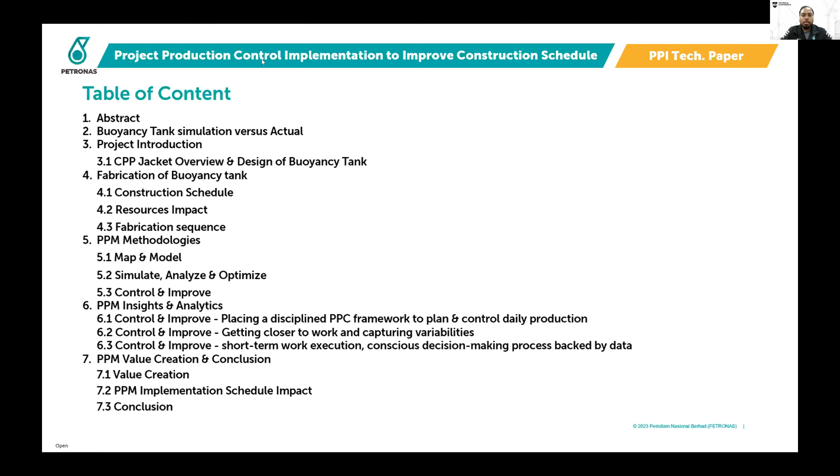The presentation outline consists of 7 parts. I will be explaining the first 3, and my colleagues will explain the rest. Next I will touch a little bit on the abstract. For this paper, it actually demonstrates the effective application of project production management methodology to positively impact construction progress and increase productivity, while exposing sources of detrimental variability as the focus of continuous improvement practices, and at the same time sharing lessons learned and best practices with PPM practitioners across the globe.

For this PPM implementation, in this specific case, our buoyancy tank has been identified as the critical path that drives the overall CPP Jacket construction schedule. PPM supports this finding by exposing the high capacity demand during the fabrication process. During construction of the buoyancy tanks, the demand and duration of the fabrication was underestimated due to its design complexity, and PPM methodology was adopted as an additional measure to complete the scope timely.

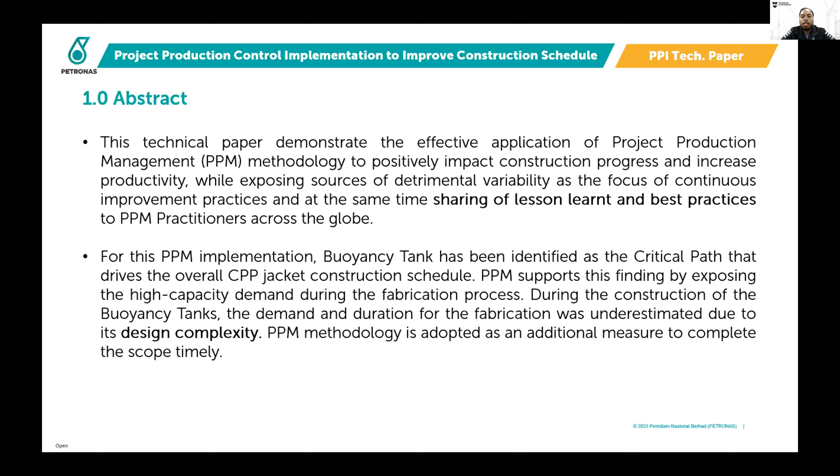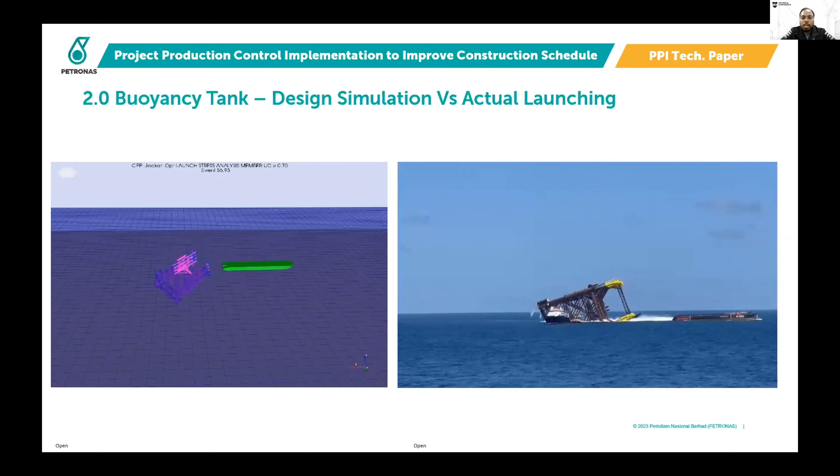Before we move on further in this presentation, I would like to share a success story following our CPP Jacket installation. Allow me to play these 2 videos, showing the comparison between our design simulation and our jacket launching at the actual site. As you can see, this shows how important and significant the buoyancy tank is, because in order for us to float the 18,000 metric ton jacket, we need that buoyancy tank, and it ensures that the operation is safe and smooth.

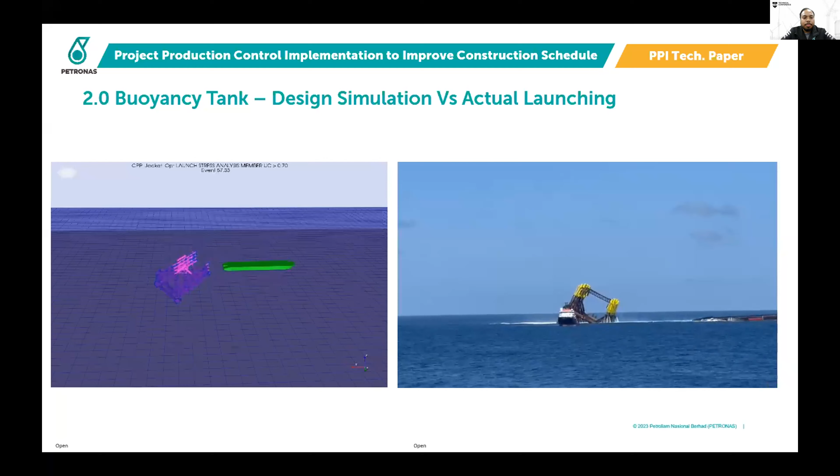So I will touch a little bit on our project overview, and also a brief CPP Jacket overview. This jacket is an 8-legged jacket at a water depth of 108 meters. It has 12 skirt piles with penetration of 102 meters below mud line. And the weight of the jacket is quite huge, about 18,500 metric tons.

The jacket has 7 buoyancy tanks, and the weight of each buoyancy tank varies. BT1 and BT2 are about 435 metric tons each. BT3 and BT4 are about 191 metric tons. BT5 and BT6 are 231 metric tons. And last, BT7 is about 261 metric tons.

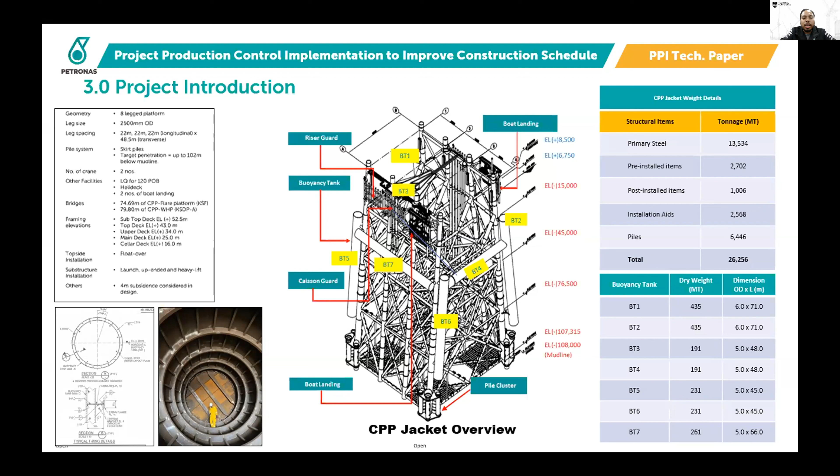As you can see in the picture below, this buoyancy tank was heavily strengthened by T-ring and angle bar at its 16 mm shell to cater for hydrostatic collapse during the launching operation. Each buoyancy tank has 2 to 3 internal flooding compartments for the jacket set down process. This picture shows how massive the buoyancy tank is compared to a normal-sized man.

The next slide shows our buoyancy tank fabrication, assembly, and erection at our contractor's fabrication yard. It also shows how massive and complex the buoyancy tank is during fabrication and assembly. So that's all from my part.

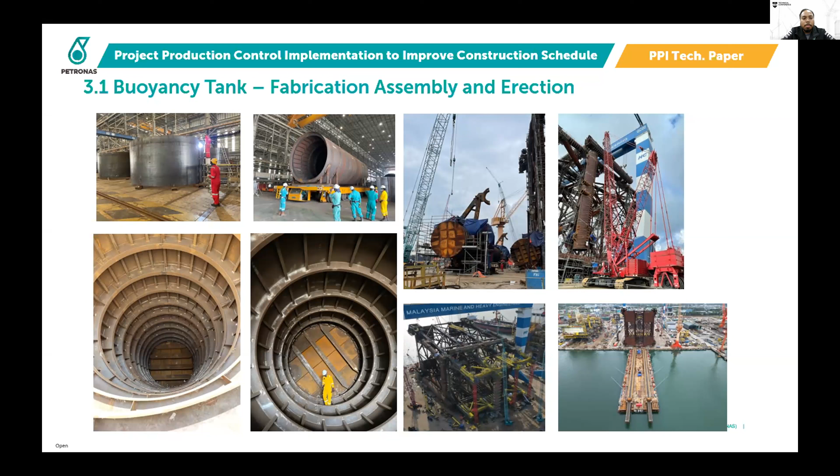For the next part, I would like to invite my colleague Puan Hamidah to continue this presentation. Thank you, Hafiz. Good morning, everyone. Now I would like to explain how the comprehensive design of the buoyancy tank has impacted construction activities. Due to the design complexity of the buoyancy tank, we have identified three major impacts to the construction.

The first one is the construction schedule itself. The second one is the increased number of resources required. The resources were segregated into a few categories; however, for this sharing we have selected three types of resources: manpower, equipment, and materials.

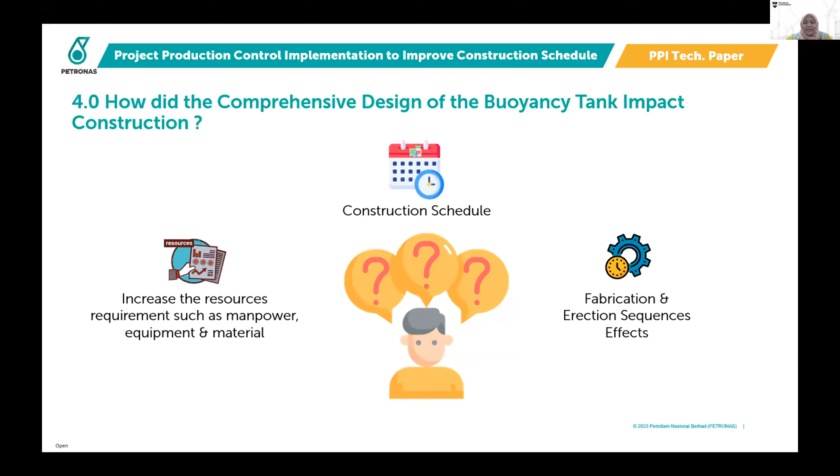And the third one is the major fabrication and erection sequence changes. Okay, so let's see the first one.

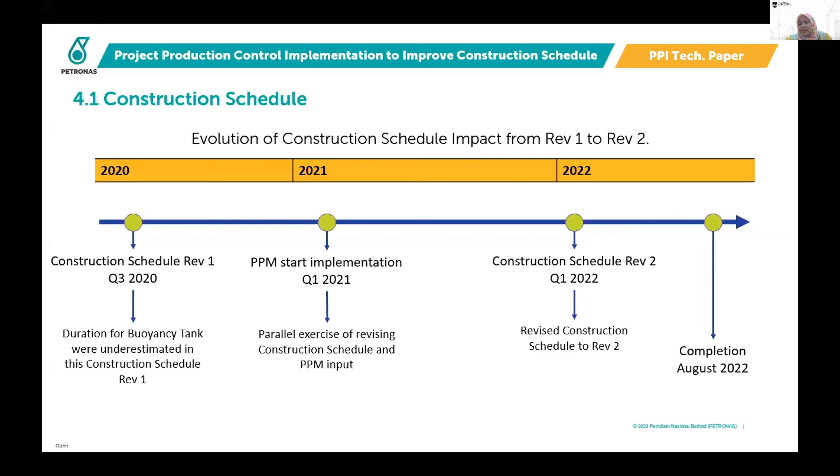In Q1 2021, PPM was implemented, and a parallel exercise of revising the construction schedule and PPM input led to the master schedule being revised to revision 2 in Q1 2022. As you can see, the schedule is moving to the right and required more days to complete the fabrication works.

Now we move to the details of the impact to the resources. The first one is the manpower. Based on the master schedule revision 2, the cumulative number of man hours specifically for construction duration for the buoyancy tank

has increased about 20% from plan versus actual. This increment is due to the complexity of the design, which required more manpower and man hours to cater to the fabrication activities. So the second one is the number.

In equipment loading, there was an increased number in equipment loading. For example, the crane usage, which the initial plan was to utilize two numbers of 600 metric ton crane. However, due to the size and weight of the buoyancy tank itself, the crane capacity had to be changed

to two numbers of crane, which increased the capacity of the crane to 400 metric ton and 1,200 metric ton, to cater to the lifting and erection activities.

And the last one under resources is the additional material required in order to support the complexity of the design. Based on record, a variance of 1,074 metric ton was recorded as the additional material required as compared to the FEED design, which was supposed to be 900 metric ton for only two numbers of buoyancy tank.

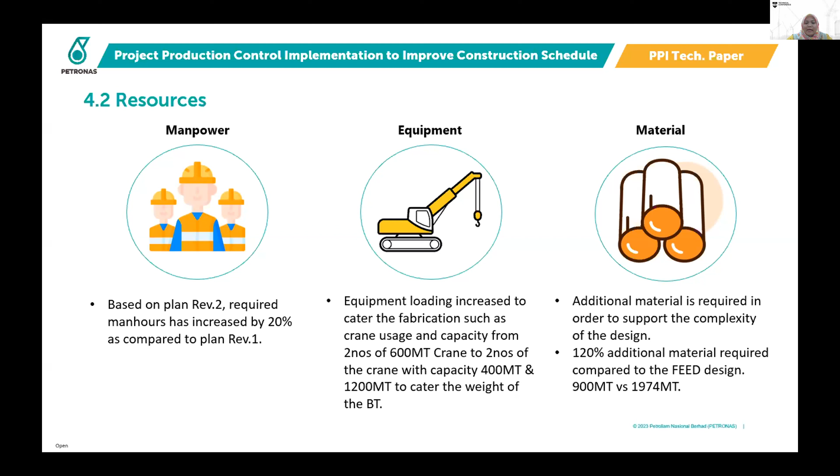However, the actual is 7 numbers of buoyancy tank with a total weight of 1,974 metric ton for all the 7 numbers.

The last one is the fabrication erection sequence impact to the project. As you can see, on the left-hand side is the planned erection sequence versus the actual erection sequence on the right-hand side. The planned erection sequence is supposed to be from buoyancy tank number 1, 2, 3, 4, 5, 6 and 7 accordingly.

However, in actuality, the numbers jumbled and it goes to 1, 2, 4, 7, 5, 3, and 6. The actual sequence has been rearranged to cater to the design complexity and to expedite the construction progress.

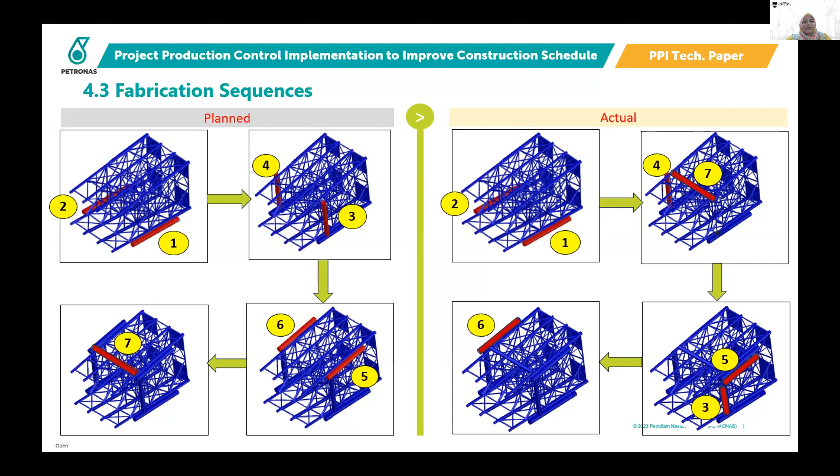So, the construction industry is a complex and dynamic field that requires effective management strategy to ensure successful project delivery. One such strategy is project production control, which views and manages a project as a production system or collection of production systems, comprising an interconnected network of processes and operations that represent all the activities to execute a project from start to finish.

For this specific sharing, the comprehensive design of the buoyancy tank has led to the extended duration of fabrication and significantly increased the resource requirements such as manpower, equipment, and material. It has also affected the current fabrication sequence and ultimately the construction schedule.

I think next I would like to call upon my colleague, Mr. Hakim, to explain in detail how PPM has been implemented to accelerate the construction progress. Over to you, Hakim. Thank you, Hamidah.

Now, let us move to the PPM methodologies. As we may already know, it comprises three main steps: step 1, map and model, in which the creation of a digital twin of the construction process and defining the production steps and systems required to produce the asset.

Step 2, simulate, analyze, and optimize based on the operation science to get the maximum throughput, control the work in process, and improve the cycle time and get the work done faster.

So we plan and control the sequence of work at the execution level and learn how to do more with limited resources and eliminate the sources of variability.

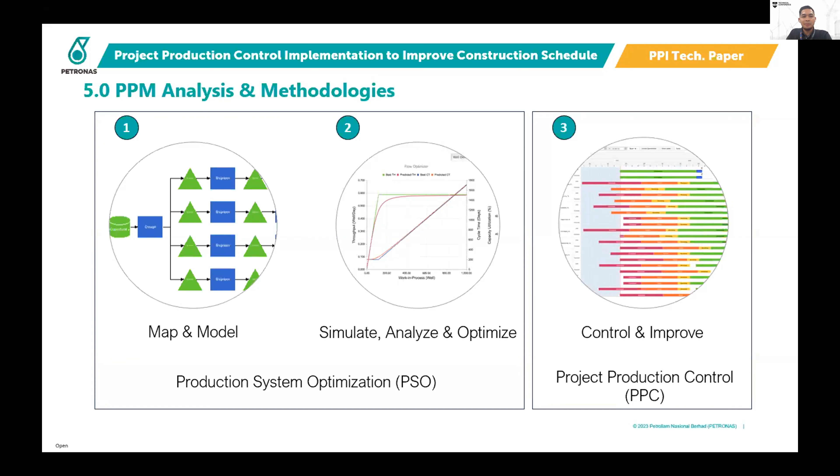Step 3, control and improve: conduct daily production planning and enable the production analytics to be unlocked and utilized by the project team. Moving into map and model.

During the PPM deployment, the team undertook an analysis on the CPP Jacket overall production system, which includes the mapping and modeling of the individual component fabrication and its erection sequence, and the final product is as shown in the figure. This effort has identified the subcomponent of the production fabrication that would produce the most significant demand on

the limited capacity, which is during the peak period, which in this case was the buoyancy tank, as highlighted in red.

Now, by the completion of this exercise, the team had already understood the 5 levers of production management and how they can be utilized to complete and accelerate the project. So the product design, which was described by Hamidah, the extraordinarily complex engineering design of the CPP Jacket and buoyancy tank. Then the process design, which is the fabrication and erection sequence of the construction work required to complete the project. The capacity, how the resources required to build the CPP Jacket will be acquired and allocated, including contributors such as equipment, tooling, labor, and space.

The inventory, how we want to control the work in process, queue, and stock, and the location required to build the CPP Jacket, which is to be determined and controlled. And last but not least, the variability, how variability will be managed and whether the project is able to absorb it.

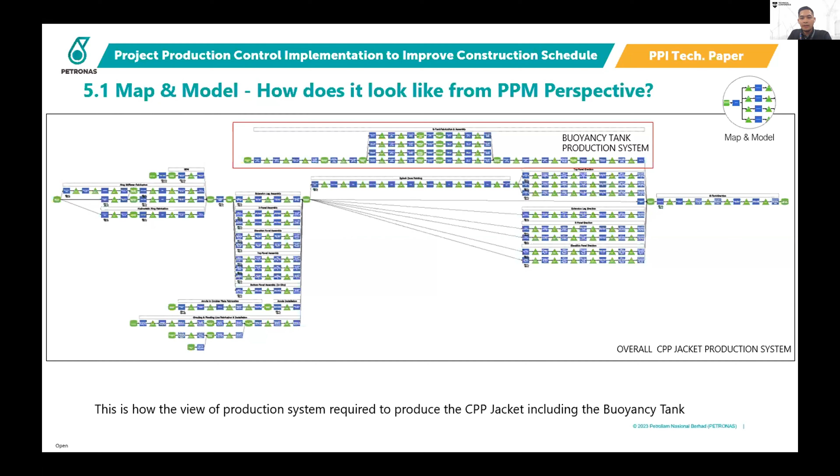Now, after the completion of the map and model, we move to step 2, which is the simulate, analyze, and optimize process. Primary findings by PMT indicated the construction schedule will face constraints to meet the desired completion milestone. PSO analysis further strengthened these findings. By doing the PSO production modeling, it highlighted that the resources required were overloaded for the jacket fabrication. So the analysis provided the breakdown of which components and also which capacity

is the bottleneck for the jacket. So on the left, you can see the forecast of completion by PSO in October 2021; it predicted 97 days of potential delay against the planned revision 1. It was supposed to be completed by 31st May 2022. Instead, PSO analysis predicted it to be completed by 5th of September 2022. As highlighted earlier, the project already made concurrent effort to continue the project while enforcing a systematic project production control framework.

So to begin with, it is important to note that the implementation of PPC requires the owner, which is Petronas, to go beyond the traditional transaction boundaries with the contractor by being more involved in the work. Despite it not being a contractual obligation for contractors to provide daily production planning and updates, a collaborative effort between owner and contractor to understand the production system has proven to be effective. The shift toward openness and transparency has yielded a positive result in completing the project ahead of time. It is important to note that the objectives of both contractors and owners are aligned, which is to deliver the project ahead of time.

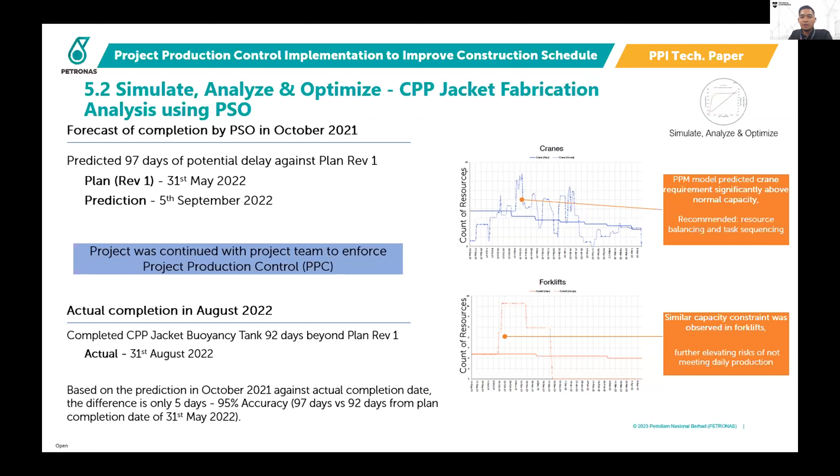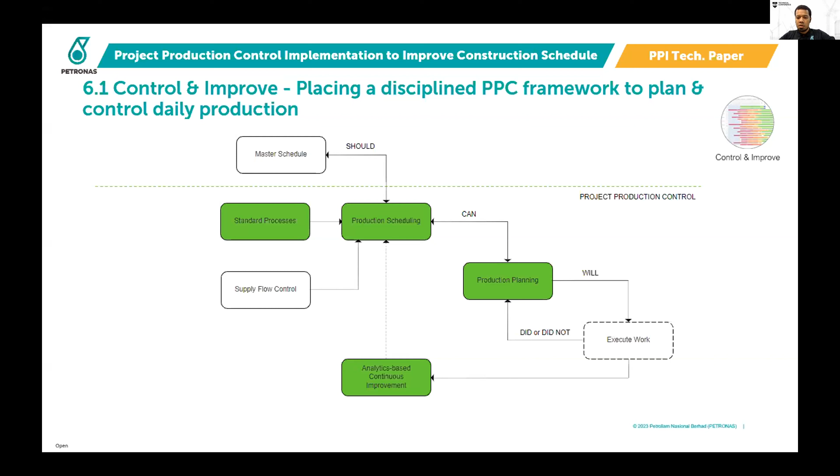And then we decide what will be executed and committed for the next reporting period, which in this case is the next day. The production plan is then updated based on the daily actual completed activities. From the progress input, we can determine what improvement we can execute daily based on the analysis and insights generated from the data we collect every day, completing the cycle of plan, do, check, and act. So this is how we get closer to the work and capture the variabilities at site. During implementation, everybody is involved with the ongoing works.

Picture number 1 shows what we normally call the war room, effectively the daily production planning session, which we hold at the end of every working day to create the next production plan. Number 2: the plan we established to commit for the next day is collected and updated in a systematic and structured way. Every worker involved in the fabrication activities will have access to this plan to ensure alignment with all relevant parties and stakeholders. Number 3 shows the actual fabrication activities at the workshop.

And number 4, from the actual progress, we verify against what we committed in the previous reporting day to update the production plan and plan for the next day. This cycle continues daily with everybody's end in mind being to meet the LRM, or last responsible moment, dates.

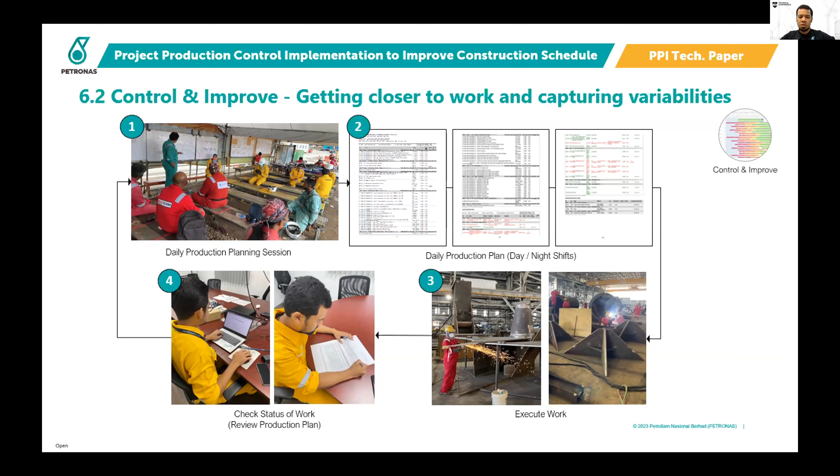By implementing PPM at our project, we are able to control and improve especially the short-term work execution, because it enables us to make decisions constantly, especially with analysis backed by actual data. For example, here we have 5 performance indicators that we refer to.

Number 1 is the reasons for non-completion. In my previous experience, normal hiccups or work stoppages are not properly recorded, especially when they happen daily, for analysis, which may eventually accumulate to give significant impacts to the overall schedule without being noticed.

The next one is the commitment reliability, another indicator that is measuring our reliability of work committed and relates to the source of variability. Task counts. This is a simple but powerful visualization of the number of tasks to be executed every day, which at best, of course, in a utopian world, should be leveled. However, in a real fabrication activity sequence, it has limits.

The 4th one is the milestone forecast. With this indicator tracked daily, everybody is aware of the movement of the completion milestone with its trending for overall and also each buoyancy tank. So we know where we are in meeting our milestone.

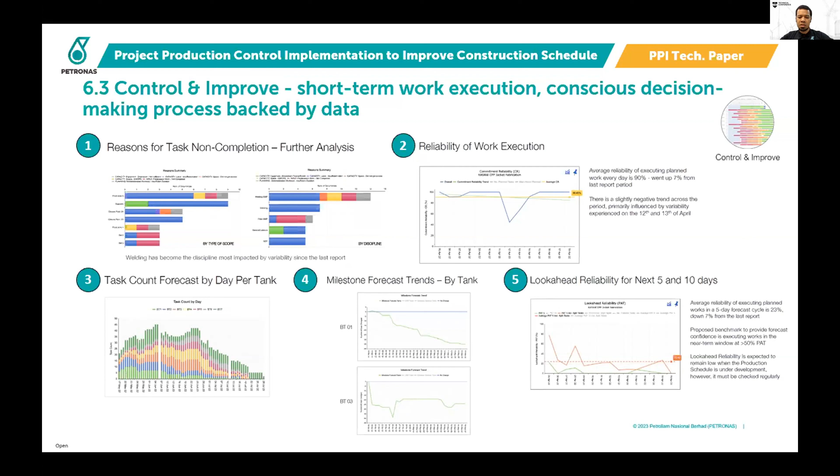The next one is the look ahead reliability. We utilize this to track our reliability to forecast, especially again for short term, whether with this current setup we can do a good reliable forecast or not, which is very, very important for the team and to report to management as well as other stakeholders. So these are some of the indicators that we utilize with daily frequency for us to analyze and adjust as required to meet our target date.

So here we would like to share some value creation that we recorded in our project. We started as a pilot in our company with this scale of PPM implementation, but we managed to create value from it. With the implementation, we got an increase in productivity and we had better predictability, which is important, as everybody is aware that surprises and variabilities are not what we desire in the project.

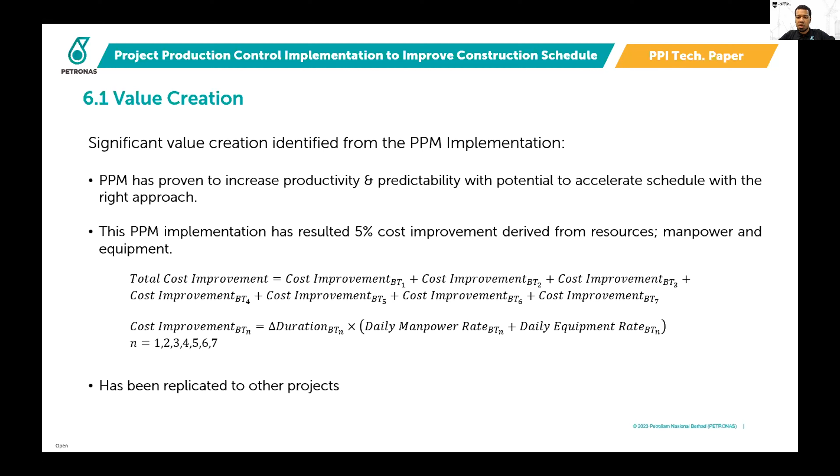We recorded 5% cost improvement, which was from the resources alone. And we formulated the calculation of cost improvement, as you can see in the formula there. Based on our actual implementation, we know that PPM is feasible to be utilized for our offshore platform fabrication activities at the fabrication yard. So this gives credit for PPM to be replicated in another project in our company, which is currently ongoing, and it's already been implemented in another project with quite similar scale to what we have done.

This Gantt chart is just visualizing the actual completion date for each buoyancy tank against the planned completion date. We have seen in the previous slide that BT7 is the most complex as compared to the other BTs. That's why its completion date is the last one. So the duration variance of each buoyancy tank is what we refer to when we calculate the cost improvement for the resources.

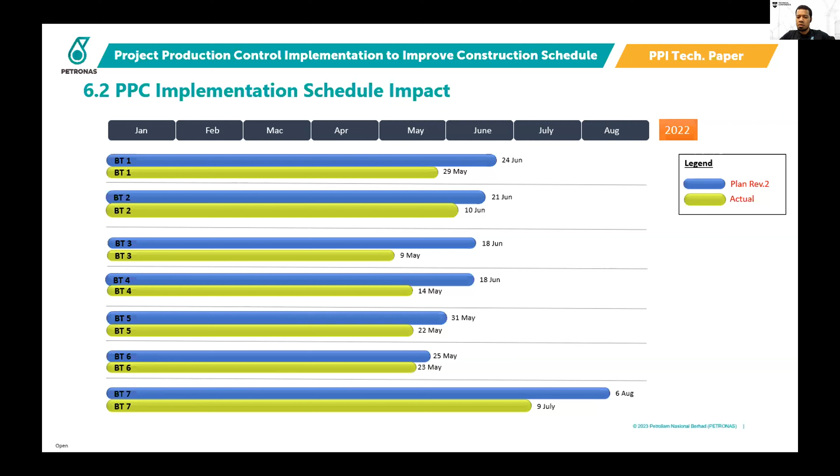Just to conclude our sharing here, we have shown that by changing our view perspective from conventional to production system, it can enhance the efficiency, productivity, and importantly, the predictability. We demonstrated that PSO and PPC methods can be utilized for planning and control at our project, enabling us to identify and record detrimental variabilities for analysis in order for us to improve. So these findings supplement conventional project management and have important and significant contribution to our construction planning and control.

So this highlights the need and importance for a shift from the current approach for construction project management to production system to improve outcomes and success in large scale projects, which for our case, the success that we define is the timely completion of the buoyancy tanks to enable the launch of the CPP jacket offshore within the target window, as per the first video that we showed before this.

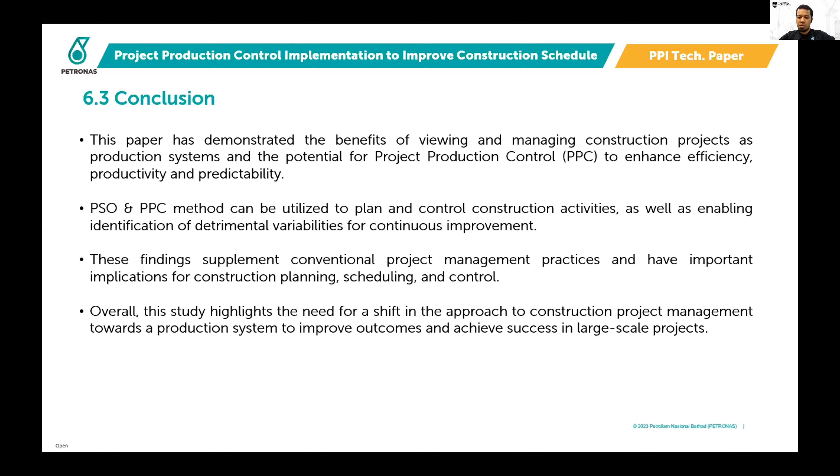Excellent. And those are some pretty impressive results. A great example of the power of predictability through production modeling and optimization, using those 5 levers, and then putting the project under control. So you know where you are, you're making real-time adjustments so you stay on track. Excellent work.

So one quick question for you in the few minutes that we have here. You mentioned a little bit of it, and I want to reinforce it. What did you see using production control that you weren't seeing with traditional project controls?

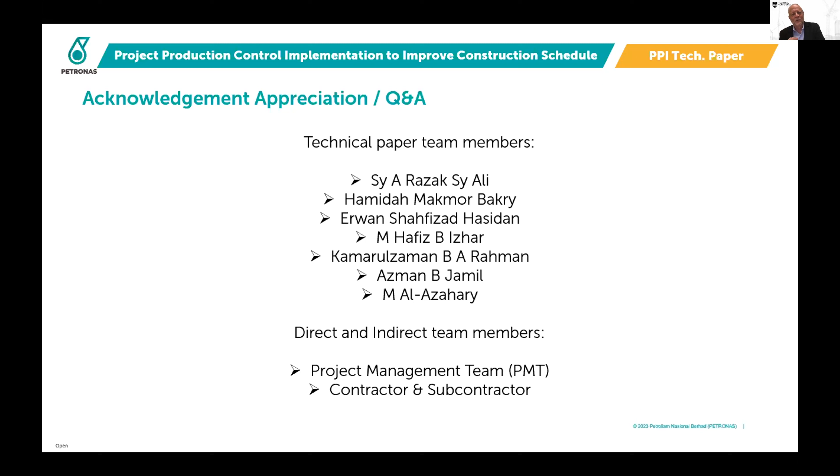Yeah, so maybe I will try to take that one before I allow everyone to also say it from the planning perspective, right? So from my perspective, the difference between what we are currently doing, right? So at the owner side, we don't typically go beyond what we call the definite line between the owner and contractor, right? So we tend to only depend on the contractor reporting and also what updates were given to us, right?

So by deployment of the systematic PPC framework to this project, the owner, whether you like it or not, you need to get closer to the work, right? So you need to get to the ground, get to the floor and understand what is currently the work being done at site and what are actually the variabilities that are affecting the work, right? So without you crossing the boundaries between the contractor and owner and without PPC, you won't be able to get this analysis.

Oh, can I ask you to stop sharing your screen? I forgot to do that so we can see your faces a little more clearly. There we go. Perfect. Okay.

So the rest of you want to add anything to that? That was a great answer. Guess not. Okay, we got another question for you. Once you modeled the production system for the tanks, did you redesign it in any way? Add more resources, e.g. cranes and forklifts?